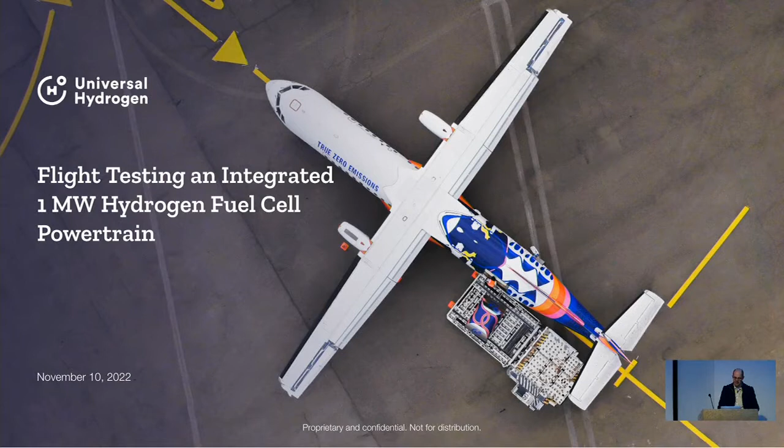So as you said, I'm going to take you through the experience that we're going through at the moment at Universal Hydrogen. I'll do a little bit of promotion of Universal Hydrogen as a company as well. We're in the process of flight testing a 1 megawatt powertrain on a Dash 8-300. So the aircraft you see there is actually an ATR 72. That's an aircraft we have in Toulouse. But I'll take you through where we are with both Universal Hydrogen, why the company was established, and what we're doing to advance the state of the art in hydrogen-powered aviation.

Maybe just to start off with, what the company is about. I think it's fair to say that we're a world-class team with a lot of aviation and energy experience. The company was founded by Paul Eremenko, who was the founder and CEO of Universal Hydrogen. Paul's previous experience was as CTO for both Airbus and UTC. I met Paul probably 7 or 8 years ago when he was CTO at Airbus.

We have a strong team of people on the executive management team, but you'll also see we also have a very strong advisory board, including Tom Enders, one of the former CEOs of Airbus, Carl Burleson, who's a former deputy administrator of the FAA, Patrick de Castelbajac, who's a former CEO of ATR. So we have a very strong team of executives and an advisory board. We also have a very strong investor base.

So the company was founded in 2020, so it was a child of COVID. It was founded in a beach house on Venice Beach, with the 4 founders working from a house in the just as COVID took hold.

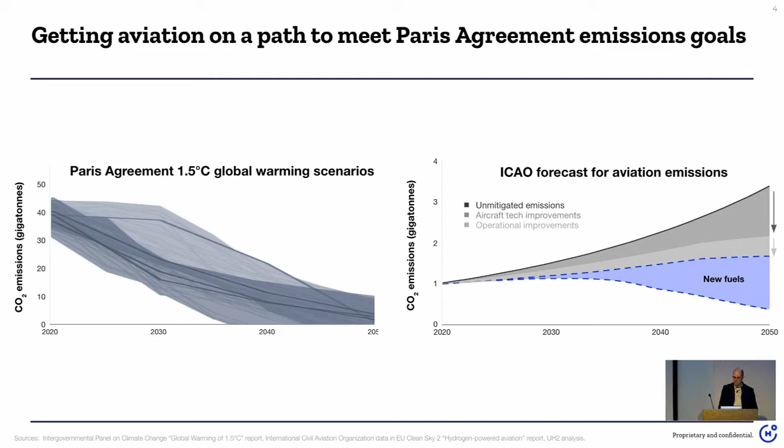So you've probably all heard about SAFs, so-called sustainable aviation fuels. SAFs clearly play a part in decarbonizing aviation because they're the sort of holy grail drop-in replacement for kerosene, for Jet A1, for the dinosaur juice we use today. But one of the real problems with SAFs is that the only scalable solution for SAF in the long term

is synthetic fuels, so-called power-to-liquid fuels that are manufactured from scratch. The sustainable aviation fuels we're using today, manufactured from recycled carbon sources like used cooking oil and wood chips, have no possibility of scaling to feed the whole aviation industry.

So what you see on this chart, I won't go through it in detail, is that there are really two ways of fueling aircraft in the future. Either you use liquid hydrogen, which is relatively easy to produce, or

power-to-liquid fuel. It's relatively energy efficient — what we show here is that, coincidentally, the energy contained in a kilo of hydrogen is almost exactly the same as the energy contained in a gallon of kerosene, which is a pure coincidence, but it makes comparisons relatively easy. So what you see is you need something like four times as much energy to produce the same amount of energy stored in a power-to-liquid fuel as you do to have the same amount of energy stored in liquid hydrogen.

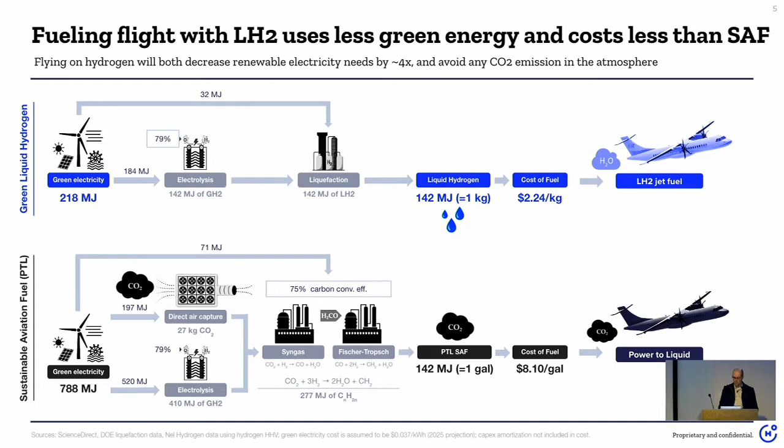That's really what we are trying to do at Universal Hydrogen, by demonstrating that it's possible to do something with current technology and existing aeroplanes, to trigger the debate about where the industry has to go for the replacement of single-aisle airplanes. So what we are trying to do at Universal Hydrogen is essentially what Tesla did for EVs.

One of the biggest problems with hydrogen in aviation is how do you get hydrogen from the producers of hydrogen, and the obvious producers of hydrogen as renewable energy expands exponentially are renewable energy sources. It depends on the country, but in California you have an excess of solar energy during the day. In the UK you have an excess of wind energy at night. In France you have an excess of nuclear energy during off-peak hours and nighttime.

So there's plenty of low-cost off-peak renewable energy around. And as renewable energy expands, the amount of renewable energy will expand dramatically. The one thing that doesn't exist is the infrastructure to get that renewable energy from the producer to the consumer.

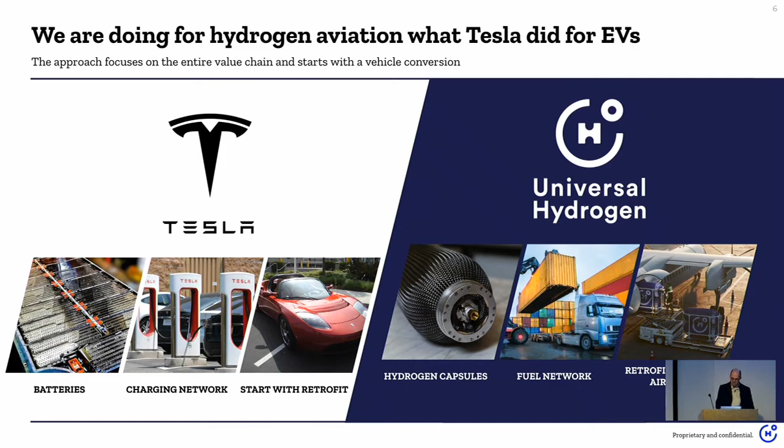And that's really where the universal hydrogen model comes in. Trying to duplicate the pipeline type approach, which is used today to deliver kerosene to airports, is something which will take trillions of dollars of investment and decades to put into place. And it has to be duplicated — you can't convert existing infrastructure, because both kerosene and hydrogen will have to run alongside each other for a significant number of years, probably even decades.

So what we're looking at is having a modular solution. We load hydrogen into modules at a factory filling site close to renewable energy sources. We then transport that fuel to the airport using the existing dry freight network that is gradually decarbonizing.

Instead of trying to refuel the aeroplane — and some of you may be aware, refueling an aircraft with liquid hydrogen is a major challenge, it's not like pumping gas — what we're looking at is what other things airports are good at. Airports are good at really three things: handling passengers, handling existing fuel, and handling freight. So what we're looking at is loading the fuel onto the aircraft like freight, like cargo that is loaded onto aircraft today routinely when the aircraft are turned around at the airport.

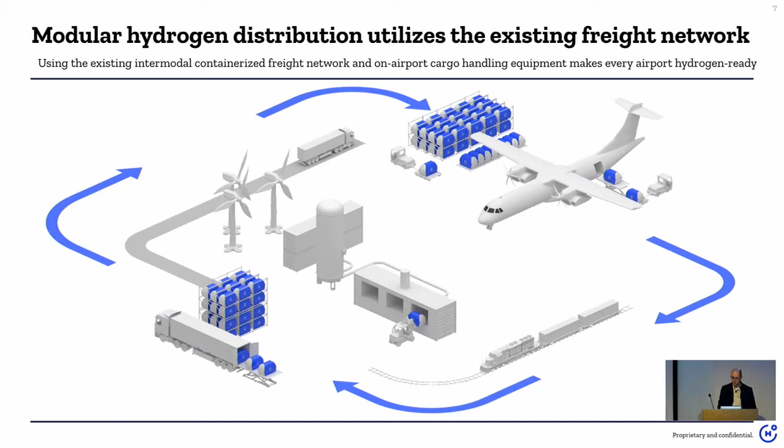So this is a demo that we did recently. This is an ATR 72 that we have in Toulouse, in our Toulouse facility. This is both our reverse engineering aeroplane — we're reverse engineering the ATR 72-600 as our first conversion vehicle — but it's also the vehicle that we're doing the loading demos on.

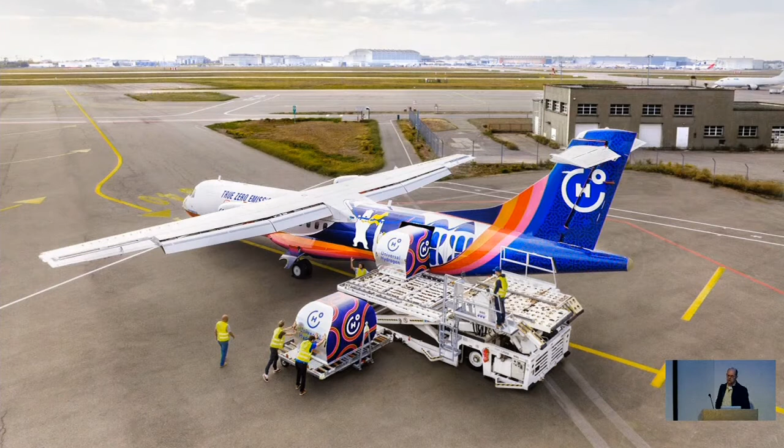So you can see there, this is a demonstration of the two liquid hydrogen modules that we need to load into the rear of the aeroplane to provide enough fuel for the flights these aircraft perform. The modules weigh about 600 kilos each, and they're loaded using existing loading equipment. That loader is actually much bigger than we need to load these size of modules. They're basically the same base plate as you'll have on an LD3 container. So it's a standard format container that gets loaded into the aircraft like cargo, and then just connected to the system.

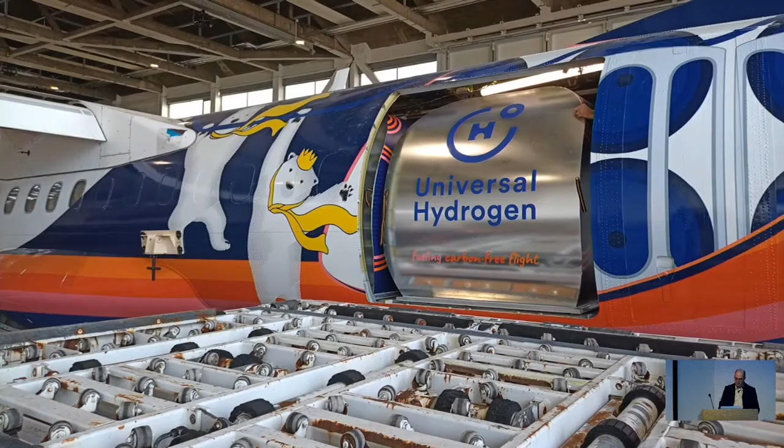A couple more pictures. That's what it looks like when they're in the aeroplane, and they're obviously designed to maximize the cross section of the ATR 72, which is our first conversion target.

So what's different about what we're trying to do?

Our general approach is we are not trying to invent any new technology. We're trying to take existing technology and apply it or mature it for use in aviation, including the liquid hydrogen storage module. So we're trying to do engineering, not science. We're not trying to invent anything new, just adapt things which already exist for use in the aviation industry.

What we're talking about here is a conventional double-walled Dewar liquid hydrogen container. It has a vacuum-jacketed, double-walled metallic structure. The liquid hydrogen is contained inside and insulated from the external heat, and we can achieve multi-day hold time without any need for venting.

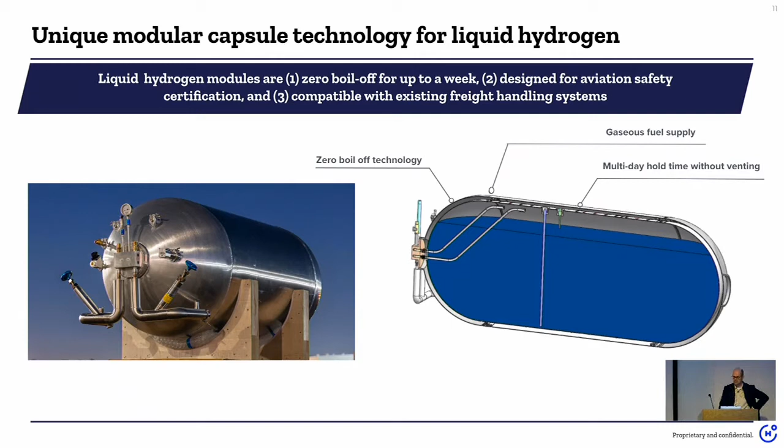So we have no need to release any hydrogen from the container between the point when it's filled at the renewable energy site and the point when it's loaded onto the aircraft and used. That's really key, because if you have to release any hydrogen, there's a risk of creating a flammable mixture. That's really the key to this technology. It's a zero boil-off technology, but it's not using anything fundamentally that doesn't already exist. There's a lot of engineering to be done to make it suitable for aviation, but the basic technology is not new.

So, coming on to the subject of the presentation here, we're looking to flight test the first 1 megawatt sized hydrogen powertrain demonstrator. What you see on this slide is, on the right-hand side, the aeroplane that we're in the process of converting. We intend to fly this aircraft by the end of this year. That picture is now somewhat out of date - the build is much more advanced than that picture, which was probably taken a couple of weeks ago.

Essentially what we're flying is the same basic configuration that we will look to certify as an STC retrofit for existing aircraft. But what we're flying on this demonstrator, we keep the Pratt & Whitney 123 turboprop engine on the left-hand side of the aeroplane, and we're retrofitting the right-hand powertrain with a hydrogen powertrain. The only thing contained in the fuselage is the hydrogen fuel. In this case, it's gaseous hydrogen, so we're using gaseous hydrogen modules initially.

We will fly our liquid hydrogen solution next year. The initial flight tests we're doing with gaseous hydrogen, which is perfectly suitable for flight testing, but is not a solution for a production aeroplane, because gaseous hydrogen containers are just simply too heavy. We can't achieve the mass fractions that we need to carry enough hydrogen in the aeroplane.

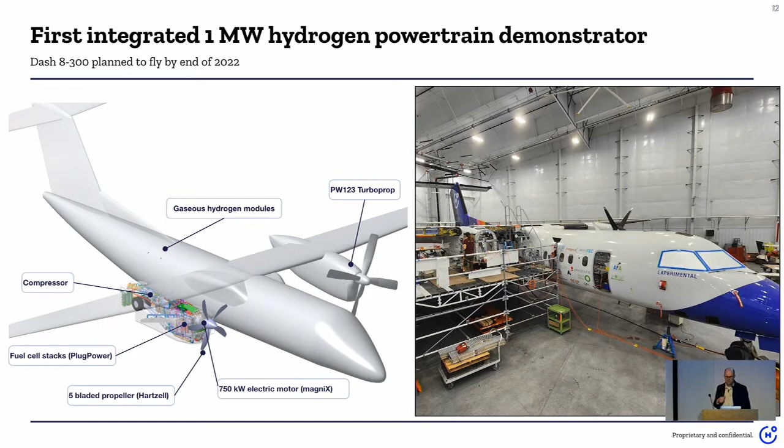We have a megawatt worth of fuel cells installed on the airplane. Those are currently supplied by one of our investors and partners, Plug Power. But the key is that all of the powertrain is integrated into the engine itself. The only thing we have in the fuselage is a flight test installation and the fuel, which is the same configuration that we will have on the conversion we intend to offer to the market in late 2025.

So this is our 1 megawatt Iron Bird. This is functionally exactly what we'll be running on the Dash 8-300. So the first thing everybody says when they look at that is, oh my God, how does that fit in the nacelle of a Dash 8-300? I can assure you it does.

I'll show you later. So this Iron Bird has been running now for about 6 months. 1 year ago, we had a bare trailer with a blue steel frame on it and nothing else. So we've gone from nothing to a fully functional Iron Bird.

That is running in exactly the functional configuration that the aircraft will fly in next month at Hawthorne as we speak. In fact, I think they didn't run yesterday because for the first time in a long time it was raining so heavily in LA that they couldn't actually run it outside, which is good for California but not good for us in the short term.

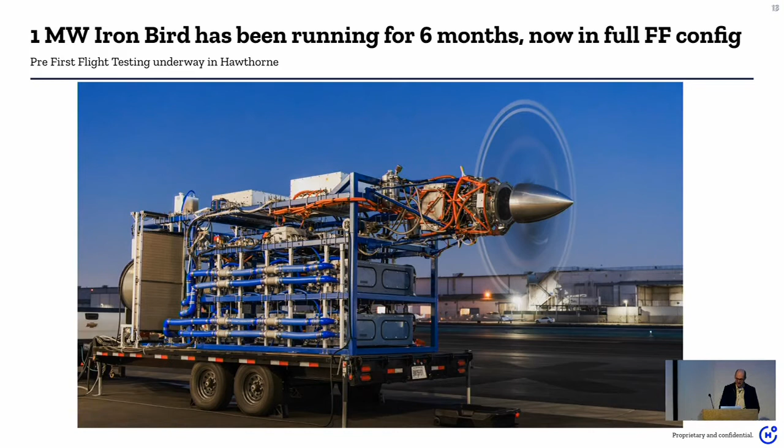So what does the architecture of this system look like? As I said, we have an electric motor, or in the terms that we use with the FAA, an electric engine. So that electric engine drives directly the propeller. The electric engine is provided with

800-volt DC power directly from the fuel cells. So the fuel cell system provides DC power directly to the inverters, which convert the DC power from the fuel cells into AC power, which drives the electric motor.

That's fundamentally different from any other fuel cell powertrain that I think you will have come across elsewhere. Almost every other fuel cell powertrain uses what are so-called buffer batteries. So you essentially have a battery driving the electric motor and a fuel cell charging the battery. On an aircraft like this, we cannot afford to do it that way because we can't afford the mass of a 2 megawatt battery, which would weigh nearly a ton per side.

And then behind that, a fuel cell is a very simple device. There are no moving parts. You basically have to supply it with compressed air, hydrogen, and it produces direct current voltage.

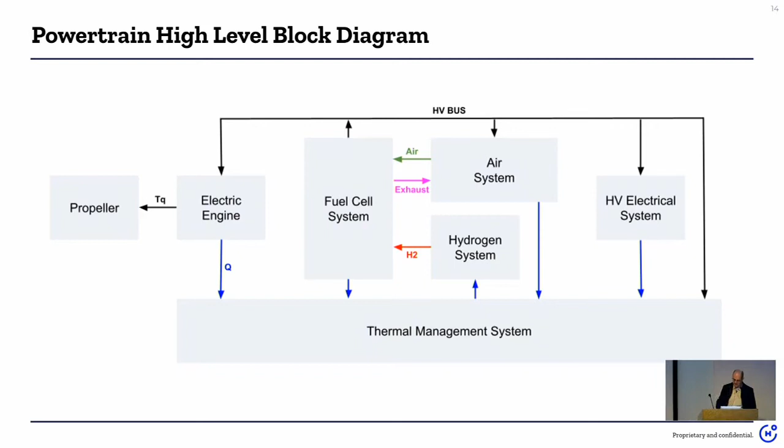But it still means that we have as much heat energy to reject through the coolant as we deliver to the motor. So we have 2 megawatts of power, or in its flight test case, we have a megawatt of power going to the motor, but we also have a megawatt of power that we have to reject, of heat energy that we have to reject. And that's where the real challenge comes.

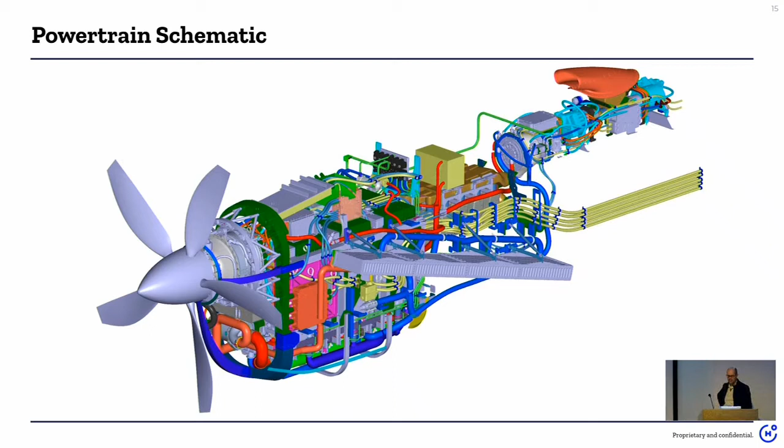So this is a schematic now of what the hardware you saw on the Iron Bird actually looks like installed in the Dash 8. So there you can see all of the functional components that are installed in the aircraft, and I'll go through each of them in turn. But you can see that it actually fits in the engine nacelle. Okay, so

I guess the heart of the system is the electric engine, the electric motor. So what we're using here is a development of the Magni 650 electric engine, which has recently flown on the Alice electric aircraft you may have seen that flew fairly recently. That's actually flying from the same hangar that we're building the Dash 8-300 in. That's a battery-powered aeroplane, but it uses the same basic electric motor.

This is boosted to produce, in our case, 750 kilowatts at 2,300 RPM. And as I said, it's directly driving a propeller, which is derived from the propeller used on a TBM 900. So it's an oil-cooled motor. You can see on the right-hand picture there. That's the engine on the test stand at MagniX in Seattle, and the motor on the left there is the motor that we will be installing this weekend, I think, on the aircraft in Moses Lake.

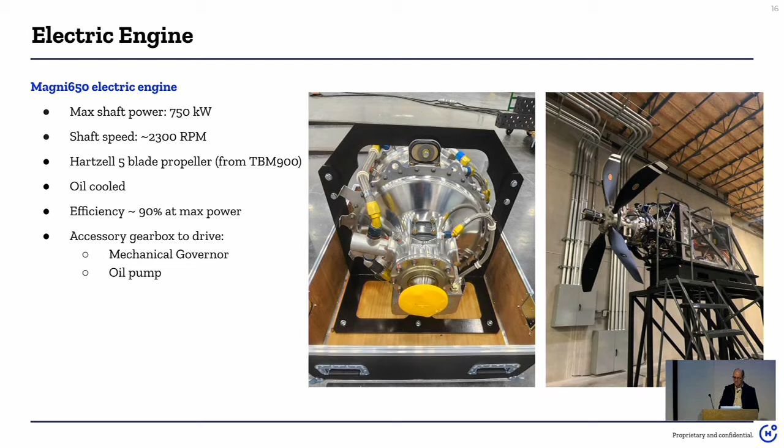So that's I guess the heart of the system. That's what generates the power, drives the propeller and produces the thrust. But that's probably the easy bit of the system. The more complex part is the part behind the electric motor that provides the power.

So fuel cells - I don't know how much you know about them. On the aircraft today we're using a Plug Power fuel cell stack. These are typically produced for ground applications, either transport applications - there's a lot of work going on to use fuel cells in trucks and big mining vehicles - or static applications like data center backups and other power backup uses. So what we're doing is taking technology which is mature in transport applications and maturing it for an aviation application. Each of these fuel cells is about the length of this desk and about half the width of it, so they're fairly big, but that produces 200 kilowatts of power per stack.

What we're integrating into the aeroplane is just the fuel cell stack, the bit where the magic happens. When you see a fuel cell engine, you'll usually see it with all of the balance of plant around it. We have our own customized balance of plant, because the balance of plant on a fuel cell engine for ground use is optimized to operate at sea level. It can't operate at altitude, it can't operate in the aviation environment.

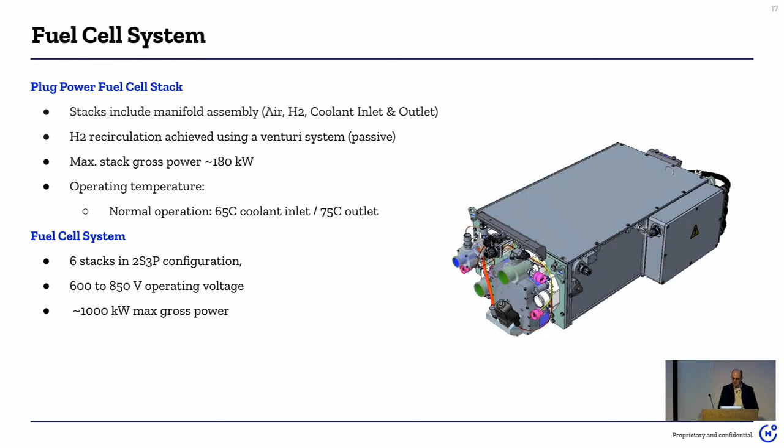Now the second big part of the system is the air management system. To make a fuel cell work, you have to provide it with oxygen. The PEM fuel cells - low temperature PEM fuel cells - produce direct current from oxygen and hydrogen. We need to provide the fuel cell with oxygen or air at around 2 bar absolute pressure, right up to 25,000 feet.

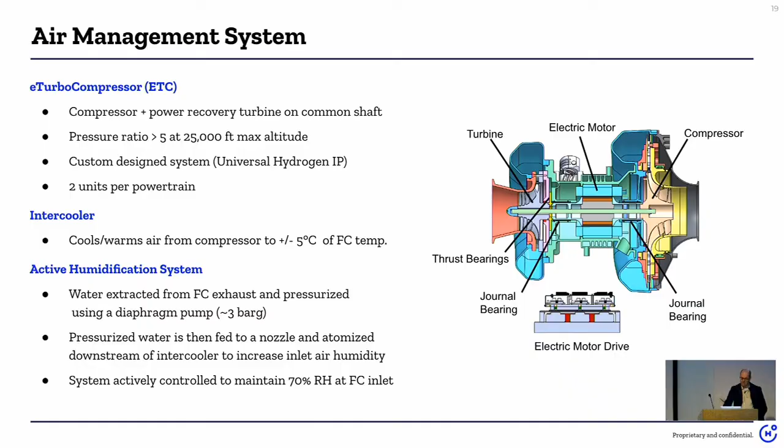So we have a custom designed turbo compressor which recovers some of the waste energy coming from the fuel cell exhaust to drive the compressor and reduce power consumption. This is a dedicated compressor that supplies air for 6 fuel cells - a single air circuit supplying air for 6 of the fuel cells. In our 2 megawatt powertrain, there are 2 of these compressors per powertrain for redundancy.

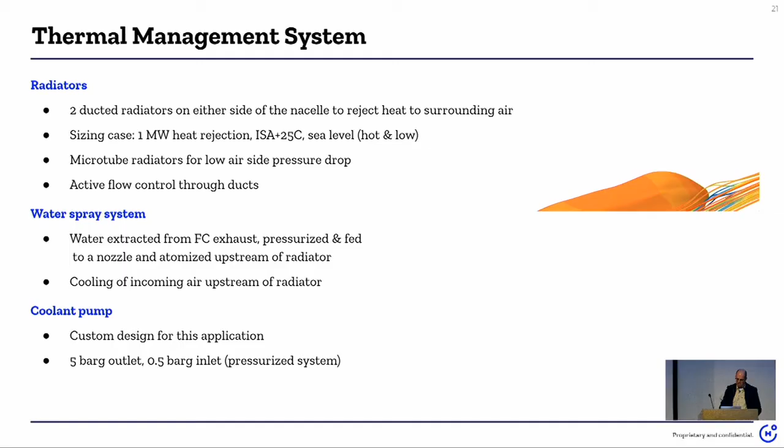So probably the biggest challenge we have is the thermal management system. As I said, even on this powertrain we have to get rid of nearly 1 megawatt of heat, and we have to do that up to ISA plus 25 temperatures at sea level. In fact, flying in December, it'll be easier because we won't have ISA plus 25 in Moses Lake.

Basically this is done using ducted microtube radiators - the sort of radiators you'd find in the side pod of a Formula One car. We have an active flow control system through the ducts, because for drag reasons we need much less air through the ducting in cruise conditions than we do at takeoff. So the system is sized by the single engine failure case, where the aircraft takes off and loses an engine at takeoff. But once you get into cruise, where the speed is higher and the temperature is lower, you reduce the amount of flow through the cooling system.

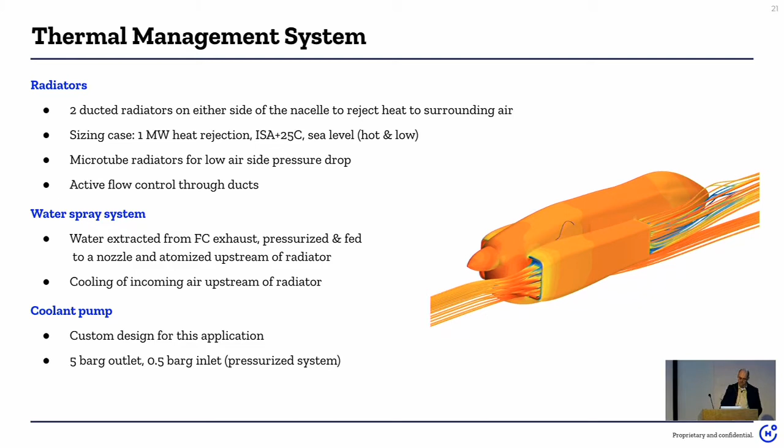So that's what the radiators look like - that's a radiator you can see there, mounted at an angle on either side of the nacelle structure.

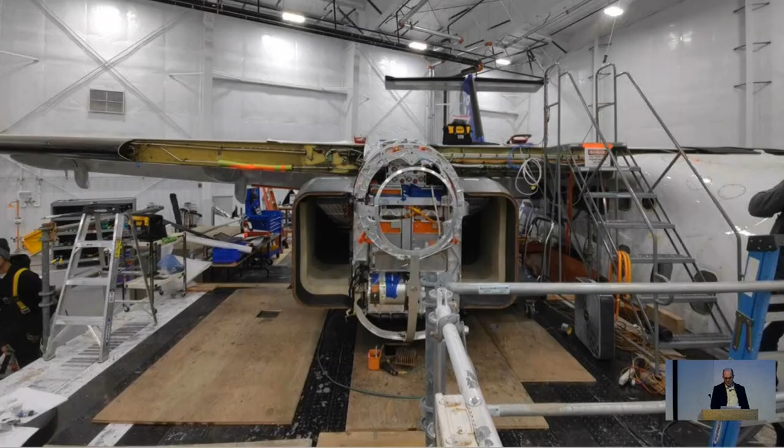And the next one shows you the ducts that you need. So those are the cooling ducts that you need to feed those radiators with enough air to produce a megawatt of cooling in takeoff conditions. Those ducts are probably a little bit oversized for the flight test aircraft, but they are pretty much representative of the size of ducting that we will need for the 2 megawatt powertrain.

So if you've seen any other fuel cell powertrains being tested with cooling ducting any smaller than this sort of size, they are not cooling a megawatt of fuel cells with ducting that is significantly smaller than this. You have to design around a very significant amount of cooling air, and there really is no way around that. The biggest challenge for us there is obviously minimizing the amount of drag that additional cooling generates.

Okay, so the last thing I would say, which is a challenge, is what we call our HEATMS controller. It's how you control all of the systems that produce the thrust. This is essentially the powertrain FADEC. This is what controls everything on the powertrain, everything from the power source coming from the fuel cells. So we're controlling the fuel cells.

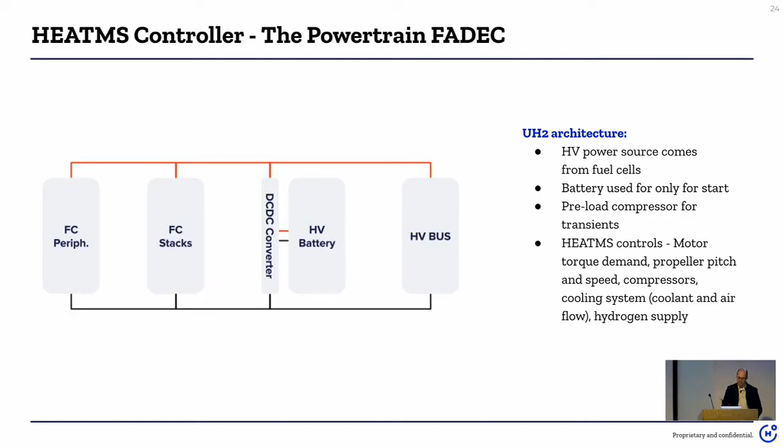So maybe just to finish by saying, what are we doing this for? We're doing this to offer conversion kits to support the conversion of an ATR-72. The ATR-72 is by far the dominant regional aircraft in this market. There are more than 800 of those aircraft out there flying today, and it's still in production.

So what we're looking to do is install a 2 megawatt powertrain, which is really just double the installation that we have on the Dash 8-300 flight test aircraft with a propeller reduction gearbox added. As you can see from the chart there, the liquid hydrogen tanks go in the rear of the fuselage with a big module loading door, just like a cargo door. The modules are loaded into the aircraft in the same way as you would load LD3 containers into the lower deck of an A320, for example. And then we have all of the powertrain components that you saw earlier integrated into the aircraft.

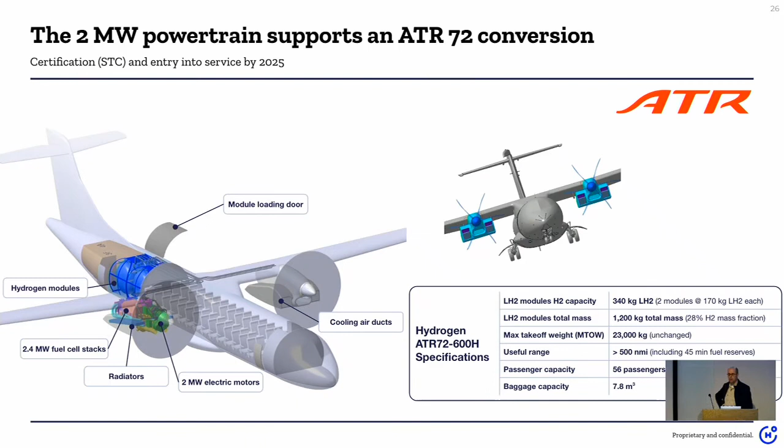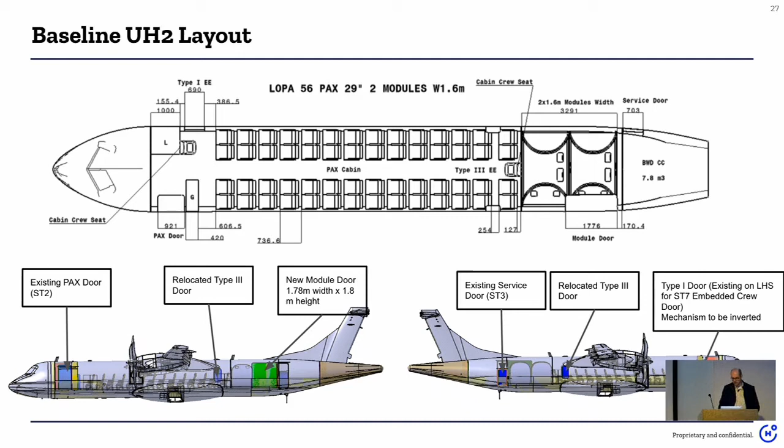So that's what it looks like in terms of a layout. You have a 56-passenger cabin and 2 hydrogen modules mounted in the rear, and then a baggage compartment at the rear of the aircraft. The real key to this conversion is that we're looking to make one which is not reliant on so-called eco warriors to make the economics work.

We strongly believe that passengers will be prepared to pay a premium to fly with zero emissions. I talked to my son's generation, and they have a very different view of aviation emissions than maybe I do or my generation does. They certainly want to have the option of flying with zero emissions.

But one of the big advantages of this type of powertrain is there are very few moving parts. There's no hot section, so the maintenance costs of the powertrain will be lower. And the fuel cost will be lower because by 2025, we expect hydrogen to be slightly more expensive than Jet A1, but because we have a much better fuel efficiency, much better efficiency of the powertrain, the actual cost per passenger kilometre of fuel is lower.

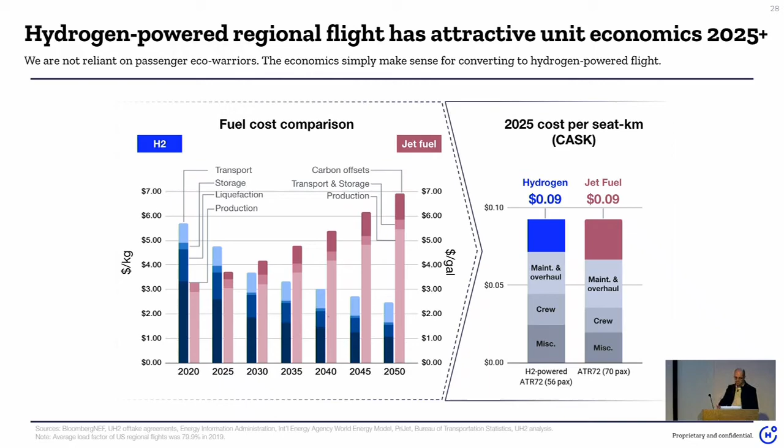So that's everything I had to say. I think I can open it up for questions. I think there's probably a lot of questions that people have, and I will do my best to answer them.